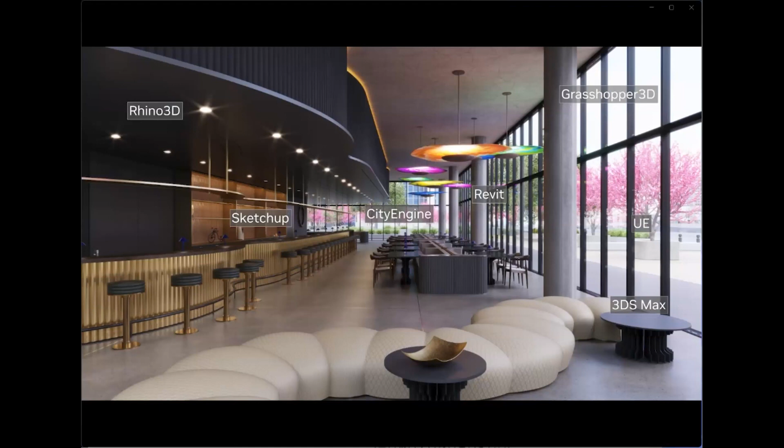When we talk about reviewing, one function of USD is this thing called variants, and we know architects like to work with options. So we can understand that somebody is working on different furniture layouts, for example, with 2, 3, 4, or 10 options built into the scene as variants. Somebody else might be working on the bar area, or the facade, or the material finishes, and they can all have their various options represented together in one scene.

Again, these options are live linked back to the design application. So if somebody makes a change, we see it reflected here. This allows us to pick, mix, and match all these different options together while the designer is actually editing or in review mode.

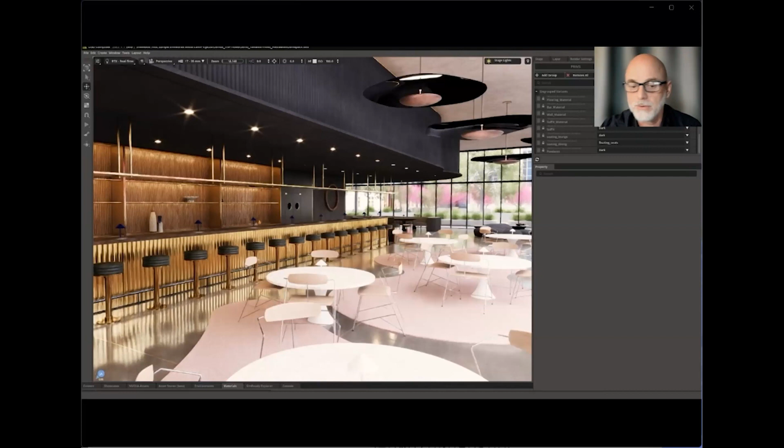More importantly, it also allows us, on the experience side I mentioned earlier, to review these options in the way we want to consume them. Here we're looking at these options through a tablet, and this user wanted to walk around with spatial movement using the tablet to look at these different design options while changing the variants back and forth.

What I didn't mention is that I was in a VR state looking at these variants, while Christian in Seattle was actually changing the variants, and Jay in San Francisco was walking around with a tablet looking at the variants - all at the same time, while the applications were linked. So again, collaboration: picking the tools you want to use and experiencing it how you want, from anywhere, is what we enable with NVIDIA Omniverse.

Furthermore, and this is important, we like to consume our SDKs and frameworks - AI frameworks that we develop. It's a really great platform for AI because of its visual quality and simulation functions; we actually have physics built into it, so the world inside Omniverse behaves like the real world, which is important for AI training.

We recently announced functions like ChatUSD, so you can type in what you want and it will generate the files and scenes based on USD functionality. I think some of you have seen text-to-materials - you can type in the type of material you want and apply it.

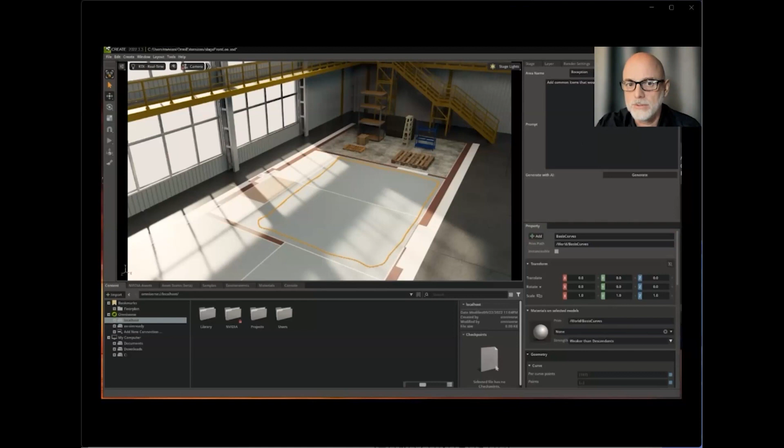Now, while we have the ability to generate 3D models from text, in our industry, it's not the most useful thing to do. It might be good for storyboarding or mood boarding, but what we really want to do is start placing elements based on actual models, actual data.

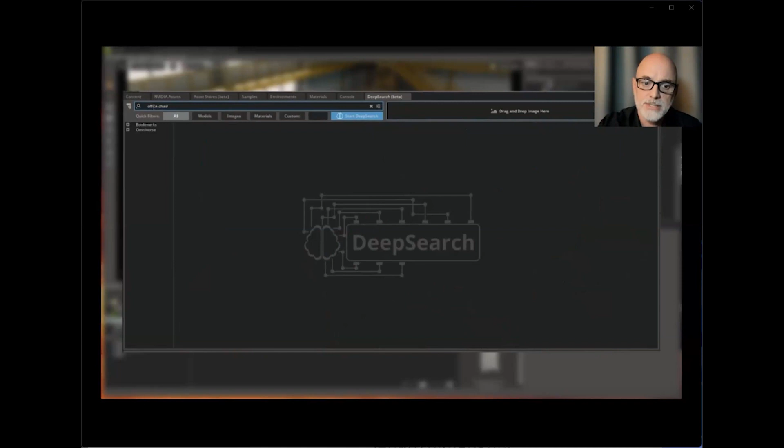So here we are generating a scene. In this case, we are asking for an entrance lobby type scene, a waiting area scene. And what's happening in the background is we're running multiple AI models here. We're running GPT models and the likes, but we're also running one of our frameworks called Deep Search, which goes through all the 3D models in our asset database and automatically captures images of those and tags them together.

So if we say that we want an office chair, it will go find out all the 3D models based on color or description or whatever the case we want to put in there of office chairs and bring them up for us to use. And when we use a function like this, where we auto-generate the layouts, that is exactly the backend system that it's using to go and search those assets and assemble them in a way that makes sense.

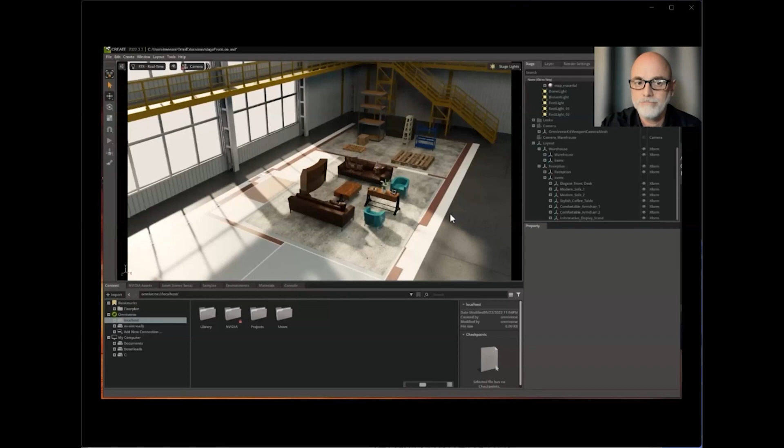But again, what's very important here is to know that these are real assets. These are the real 3D models that are validated by us that might have data properties and simulation properties, etc. attached to them. They're not generated meshes that don't mean much for our construction and our design industry.

So the great use of this, of course, is that we can be in a VR moment and actually talk to the computer and see the changes, or we can have users that need to make decisions interface with the model without having to understand how to use the software, which buttons to click, or what to do.

All they need to do is talk in English or in the preferred language that they are using to cycle through the various options and actually go, well, we actually like this version of it, and we're going to save it as a certain state to go back to it and review that with the final output or the client, whatever the case is.

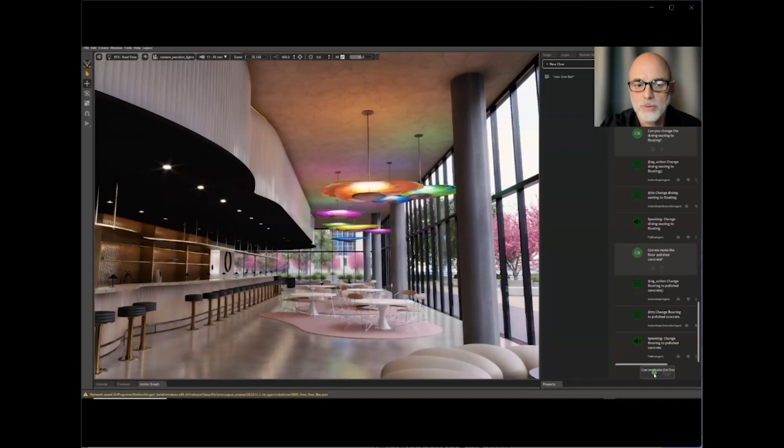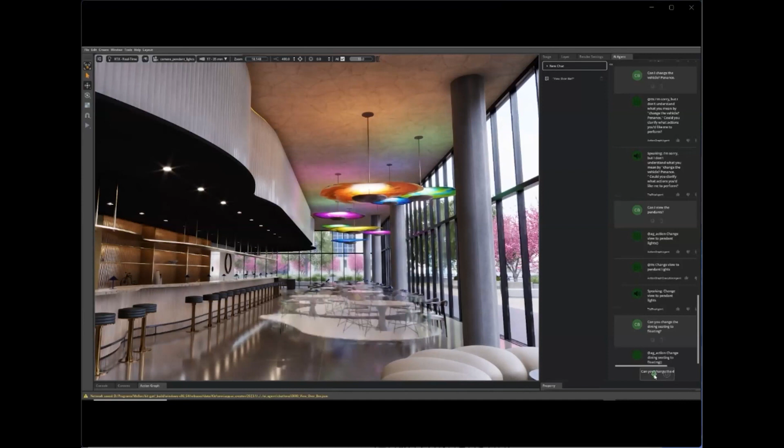Can I have a view over the bar? Change view to bar camera. Can I have a view from lounge? Change view to lounge area. Can you change the lounge seating to gold? Change lounge seating to gold. What materials can you change off the bar? The materials of the bar that can be changed are bright and dark. Change the materials to bright. Change bar material to bright. Change the wall to bright. Change material on walls to bright. Can I view the pendants? Change view to pendant lights. Can you change the dining seating to floating? Change dining seating to floating. Can we make the floor polished concrete? Change flooring to polished concrete. Can you save this as the bright version? Your preference for the bright version of the scene is noted and will be saved for future references.

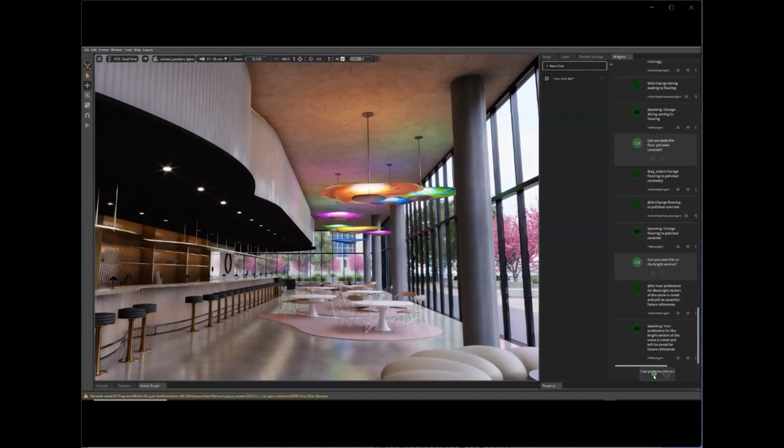So where this is heading towards, again, is the ability that probably in the near future, we will be able to have conversations and brainstorms where the computer as an interface will be part of that and react to what we do, whether that will be sketching or actually using normal computational functions or input devices like mouse or keyboards, or talking.

So while we are discussing things, we may very well say, this kind of layout that we have here and the landscape that we have, can we change it to that landscape and change the entrance to this entrance? And can we make a variation in material in this entrance to see how that actually works together?

Again, back to the original start of this conversation, our ability to interface with compute has become sort of democratized and more natural, allowing us to get back to a point of thinking about what we're doing instead of trying to think about how we're going to do it. Let the computer figure that out as a high performance compute function in the background and give us the experience feedback in real time. I think this is not too far away when we're going to be in that sort of framework.